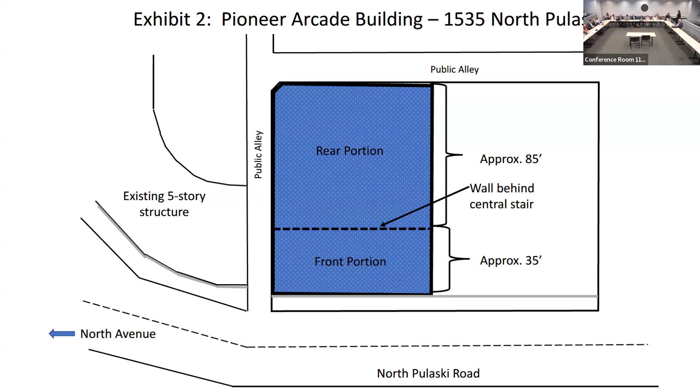The Pioneer Arcade building was designated a Chicago landmark in 2023. You may recall that the significant features of the designation included the front portion of the building, defined as the first approximately 35 feet of the building, which includes not only the front facade but portions of the north and south facades too. Under the designation, the rear portion of the building, 85 feet behind the front portion, is allowed to be demolished. The designation was further defined by allowing for the development of a new 6-story construction behind the front portion of the building, as well as to the south of the designated structure.

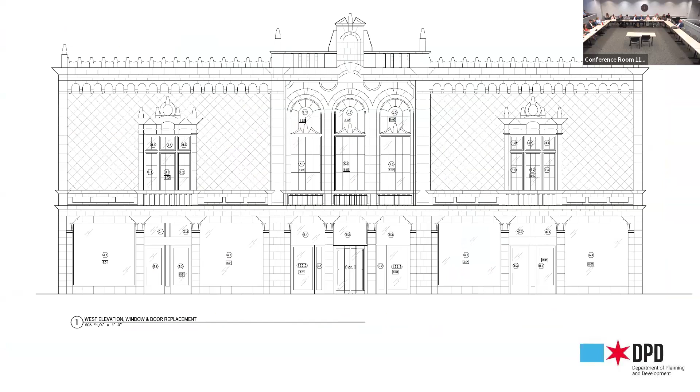The overall development is a 60-unit affordable elderly housing project on the site. The $510,000 Adopt a Landmark Award will address condition issues on the landmark building only, primarily on the main front facade, including terracotta work, other masonry work, and window and storefront work. The project also includes masonry work to the north and south facades, as well as interior lobby work. New storefronts and windows will be installed to match the historic configuration on the front facade.

Terracotta units will be repaired, reset, or replaced as needed to address all the condition issues on the front facade. Common brick on the north and south elevations will also be replaced where needed and pointed.

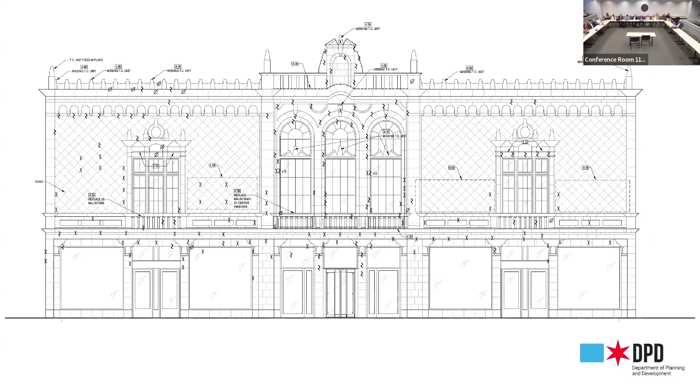As previously stated, the Adopt a Landmark Grant Award is $510,000, and before you is the complete detailed scope of the work that I just summarized. It should be noted that the total cost for the entire project is in excess of $36 million, and of course, that includes the new construction components of the building. While none of the new construction costs are Adopt a Landmark eligible, as you can see, the eligible Adopt a Landmark costs well exceed the grant amount.

Similar to all of DPD's Adopt a Landmark projects, the project will be subject to certain Adopt a Landmark conditions, including that the applicant shall notify the commission staff of undocumented detrimental conditions found during the work. The applicant shall enter into an escrow agreement to assure that the landmark project is completed and paid for in a timely manner. And final payment from the Adopt a Landmark funds is subject to certification by the commissioner of the department that the project was completed in accordance with the requirements of the Adopt a Landmark funds, the project scope of work and budget, the agreement, and the landmark guidelines.

Thank you, that concludes my report. Department of Housing staff should be here to confirm, as well as Hispanic Housing Development Corporation. Alderman Fuentes has indicated her support of the overall project.

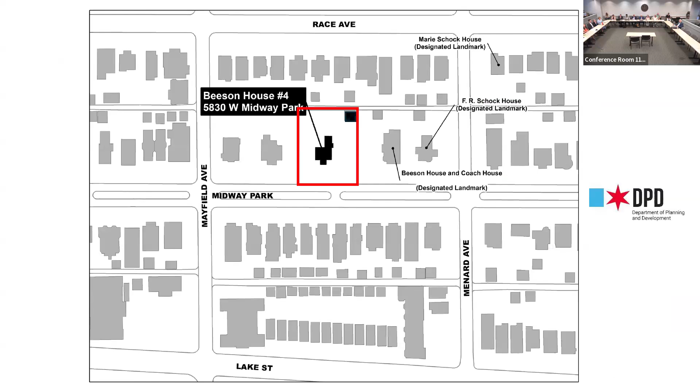The property is located, as Commissioner Wong said, at 5830 West Midway Park. That is on Chicago's west side, of course located in the Austin community. The home sits on a large lot with the garage at the northeast corner.

The Commission preliminarily recommended the home meets 3 criteria for designation, including criterion 1 for heritage. So in 1865, developer Henry W. Austin bought several hundred acres east of Oak Park. The land was adjacent to the tracks of the Chicago and Northwestern Railway, and a year later, a railroad station was built at Central Avenue in Austin. It was the first suburban station on the Galena division of the railway.

Henry W. Austin subdivided his property in phases, making improvements as he went to entice potential purchasers. He donated 4 acres for a park in the center of the village, Olden Park, and planted thousands of trees along the village's streets.

By 1874, Austin's population had grown to around 1,000 residents. Henry Austin had envisioned his property developing into a railroad suburb. In the latter part of the 19th century, developers planned these outlying communities around commuter railroads. Oversized lots provided ample space for substantial single-family homes in a refined, country-like setting. Real estate speculators touted them as removed from the congestion and pollution of the city, but with excellent transportation, intended to entice the middle and upper class executives and professionals who made their money in the city. It was not until better than hourly suburban train service was established in the 1880s that much of Austin's growth really began.

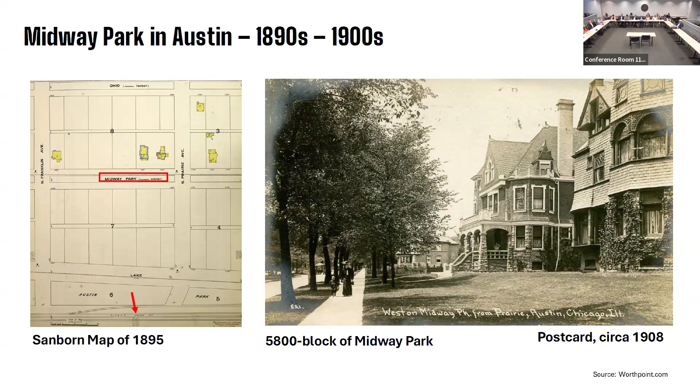Beeson fit the profile of the type of person attracted to a railroad suburb like Austin. The Chicago Veneer Company, where he worked, was at 507 West Kinzie in Chicago, directly opposite the Chicago and Northwestern line, which led to Austin.

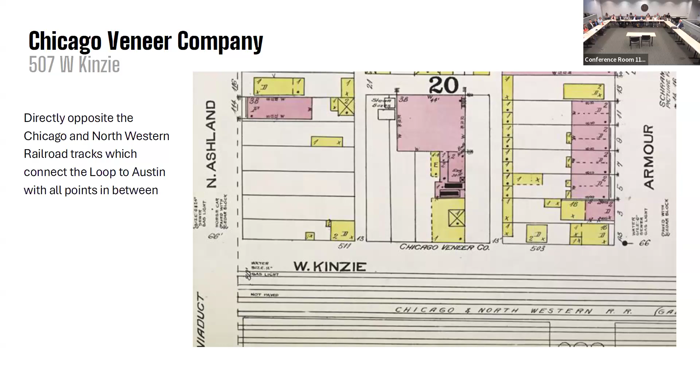And if I had a drum, I would be doing a drum roll now, because I found something that I have not seen anywhere else, and I'm very excited. I'm such a geek about research.

Schock understood the value of connections for his architecture business, and Fred Beeson was a member of the social club that Schock had helped to establish in 1882, the Oaks Club. This membership organization became the center of social life for many prominent Austin citizens, a number of whom were clients of Schock. Schock also took an active role in Austin's civic life.

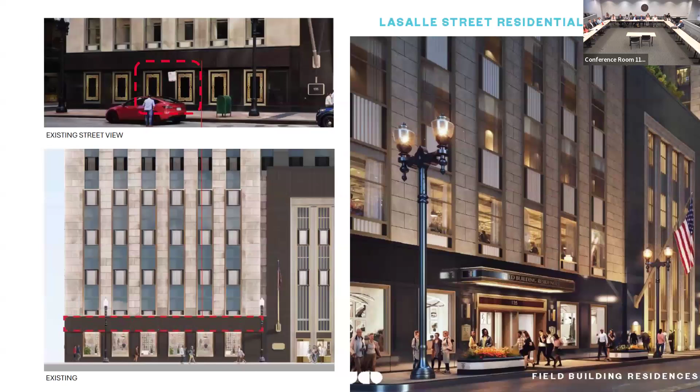Exterior Class L eligible work will include repair of the granite building base and upper floor masonry units, and reestablishing, based on historic documentation, a larger door opening on the LaSalle elevation to create a dedicated residential entrance and lobby beyond, depicted here in the rendering on the right.

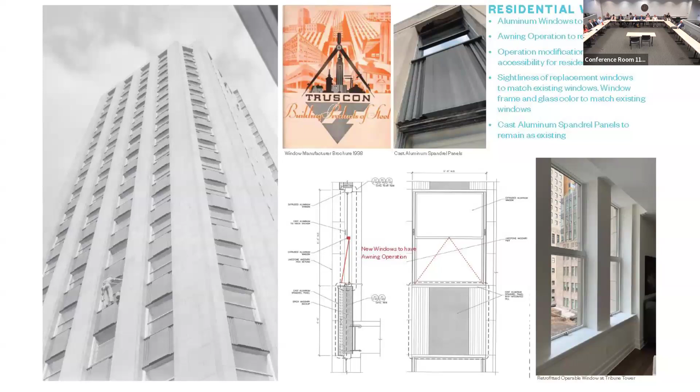Obscured window openings will also be restored to clear glazing and trimmed with metal frames to match the historic openings. Window sashes on the bottom 4 floors will be retained and restored. On residential floors 5 through 14, new windows replicating the appearance of the historic double hung sashes will be installed. However, the lower sash will be an operable awning window to meet code requirements. Cast aluminum spandrel panels will be preserved in place.

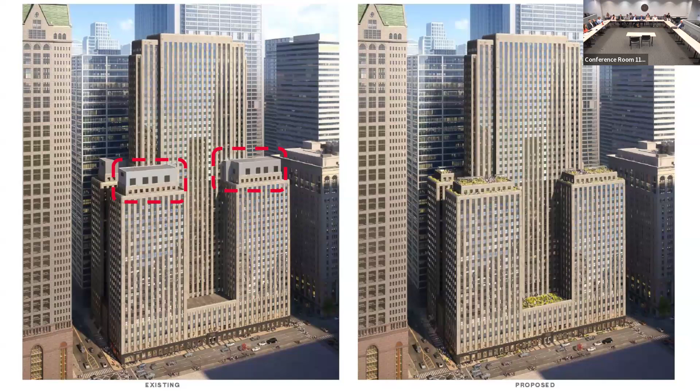Circled in red are non-historic mechanical penthouses that were constructed above the 4 corners of the 25th floor. These housings will be removed, new roof surfaces installed, and outdoor amenity spaces created in their place.

As part of the 1994 landmark designation, the interior arcade was identified as a character-defining feature to be preserved. Several display windows will be minimally altered, but the remainder of the arcade's materials and finishes will be preserved as is.

Based on budget estimates, the project team expects to spend approximately $241.6 million on the Field Building rehabilitation. The minimum required investment to qualify for Class L on this building is $17 million. The size and scope of Class L eligible expenses for the project amounts to just over $190 million. So the rehabilitation scope is exceeding the minimum requirement by $173 million.

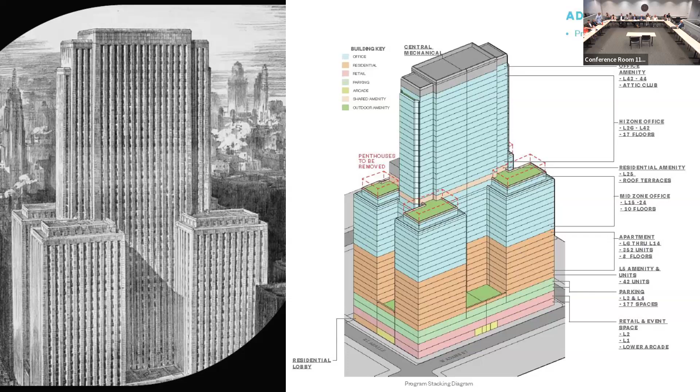Next item on the agenda is the Class L property tax incentive final certification for the Illinois Bell Building located at 225 West Randolph Street in the 42nd Ward.

Good afternoon, Commissioners. Rehabilitation of the former Illinois Bell Building has been completed, and the resolution before you is for final certification of the Class L scope of work and budget. Certification is the Commission's final action and enables the building owner, 225 West Randolph Owner LLC, to complete their application with the Cook County Assessor's.

On January 27th, 2021, the City Council designated the Illinois Bell Building as a Chicago landmark and approved a Class L real estate property tax incentive for the building at the same meeting. The 31-story building, designed by Holabird and Root in the new formalist style, was constructed in 1966 and served as the regional offices of the Bell Operating Company, once the largest telephone company in the United States. This building consolidated staff from Illinois Bell's 8 separate city offices into one central location. At its peak, the company employed roughly 36,000 workers in the Chicago area.